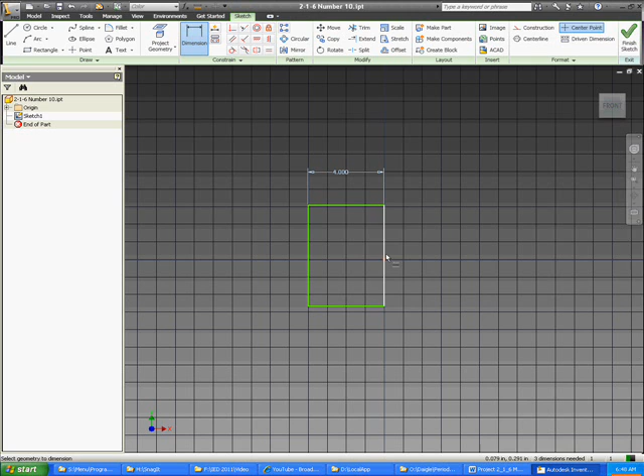So if I come over into my Inventor part file, go into the sketch, I can start with a rectangle, then sketch, dimension, extrude - that's the normal way you start a solid model. So I dimension 4 inches by 2 inches, and I have the rectangle to start, and then I need to add the arcs onto the end.

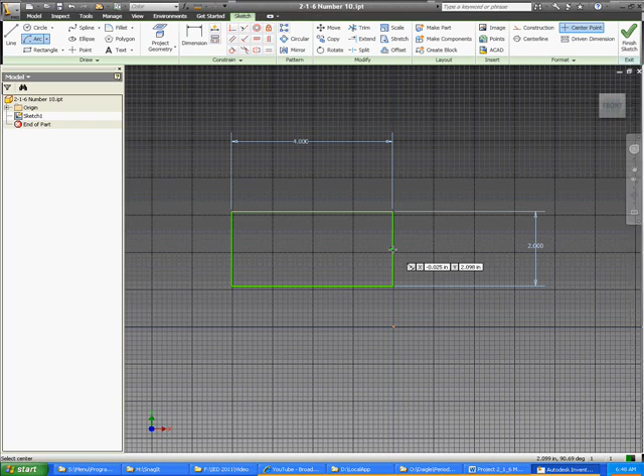If you look at the arc, it comes out 1 inch between the center point and the end of the arc, so the radius is 1 inch. We can start with a circle, or use the arc tool and do a center point arc - you'll notice Inventor infers the center point with that green dot - and start it on the end point and draw it all the way around.

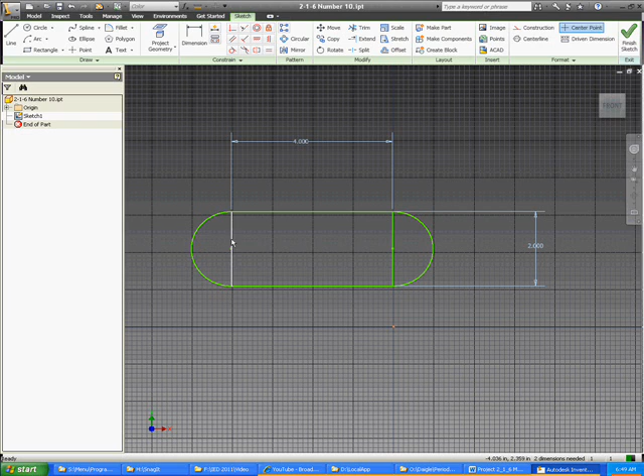And the same thing on the other side - let Inventor infer the end points and the center point. You've got the basic shape. Now you can go back and delete the lines you don't need, and you can begin by extruding this sketch.

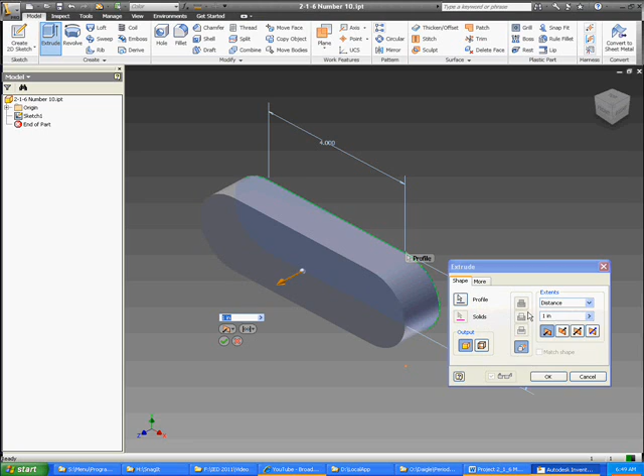And if you look back at your drawing, you'll see that it comes up 1 inch to get to this point right here. So we extrude it 1 inch, and now we have the beginning.

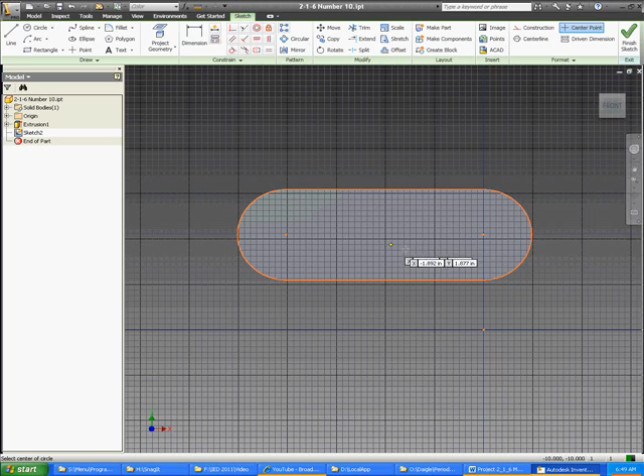So the next step is to create a 2D sketch on the top face, and we will then put the hole here with a subtractive modeling technique. The hole is 1 inch in diameter, and you can notice that it's centered. So I'll start with a circle, the center point's already there, and I'll type in the dimension of 1 inch, finish the sketch.

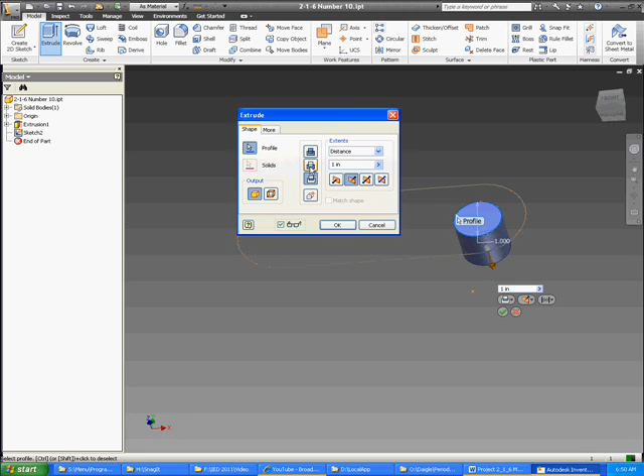Rotate it so you can see, and cut extrude. Be sure to select the cut extrude option, and now you have the first hole created.

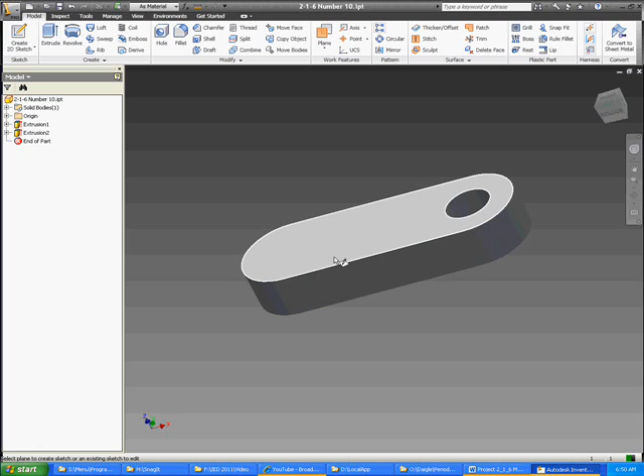Now to create this next extrusion coming up, we're going to add onto it, and we'll do 2 concentric circles. So we'll start with the circle tool after we create another sketch - notice the sketches are appearing in the browser.

So using that center point, we'll create a sketch, and you want to look at the sketch - the full circle, the full diameter of 2 inches, and then the full radius of 1 inch, and then a radius of a half inch. So we start with that, and then another circle that would have a diameter of 1.

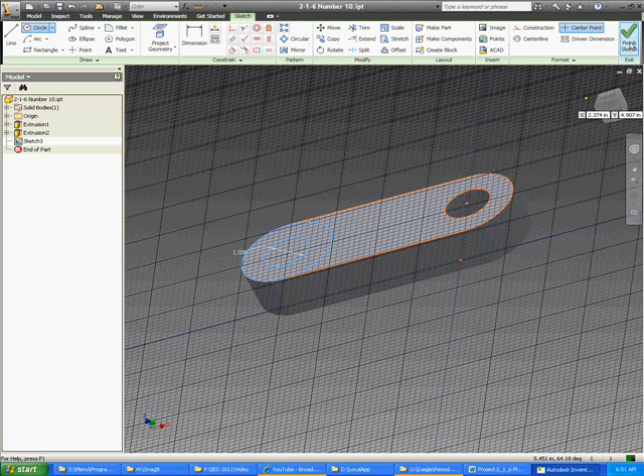Finish the sketch and extrude that part, and you want to come up another inch. So check back with your diagram each time.

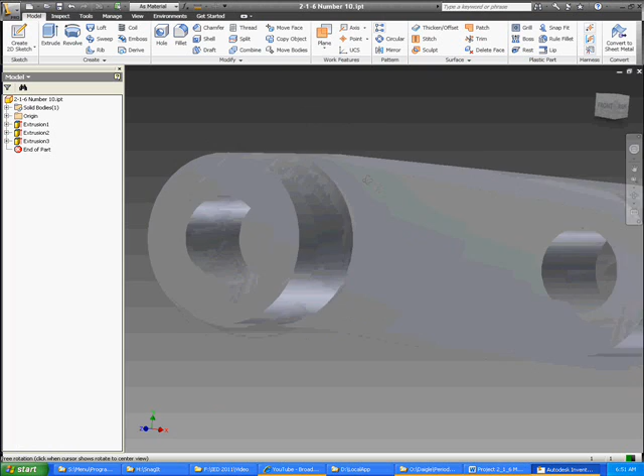And then if you see there's a problem, you need to go back and finish the cut extrude through by creating another sketch inside, clicking on that face, and then you can draw a circle and cut it all the way through.